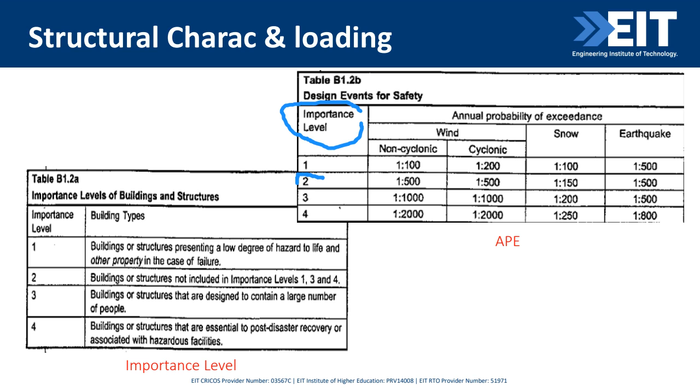Here are the tables that you can find in the standards. On the left side, you can see the importance level. We already know that the importance level is 2, so we can have the wind load and earthquake loads. This is the annual probability of exceedance, or APE, which as you can see here is 1 in 500 years.

How do we get the importance level? You can see here, importance level 2 covers buildings or structures not included in importance level 1, 3, or 4. Level 1 is buildings or structures presenting a low degree of hazard to life, so the most important part is the life of the people, and other property in the case of failure.

Level 3 is buildings or structures designed to contain a large number of people, for example high-rise buildings or any commercial building, as well as buildings or structures essential to post-disaster recovery or associated with hazardous facilities, for example fire stations and hospitals.

So our building, or our structure, which is the plant, is not categorized in group 1, 3, or 4, so the importance level is 2.

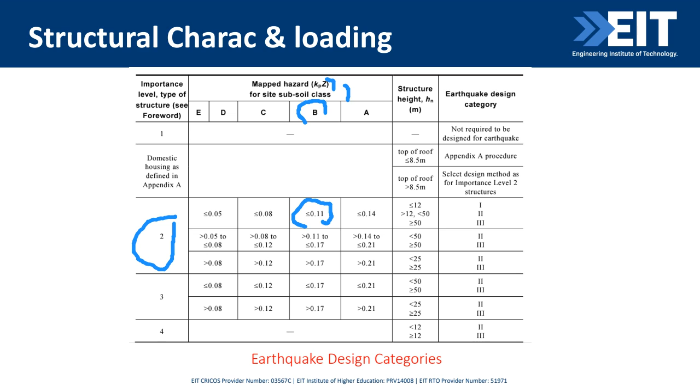From this table we can find out the hazard based on the site soil class. We have soil class B here, importance level 2, and also the structure height here is lower than 12, so the KpZ would be something lower than 0.11. This is the earthquake design categories, and this is how we can find the hazard factor.

And the other coefficients here, and this is also would be the base shear. So here, based on the equation, we have the base shear calculations. We already get to know the parameters that we need to put here.

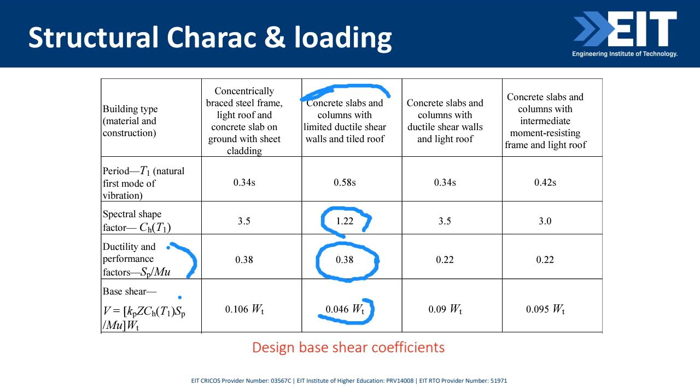At this slide, we have all the parameters that we need. Then substituting into this equation, we can find out the final equation for the base shear with respect to the weight of the structure.

We also need to consider that this weight of the structure is the in-service weight, because this is the LNG plant. The majority of the structures are prefabricated and just shipped to the location and installed on the footing. So we should know that for the earthquake design, we need to consider the operation weight, or wet weight. But for the wind design, we need to consider the dry weight, or shipping weight.

This is because in the earthquake, the base shear, as you can see here, is a direct function of the weight of the structure, and it affects the earthquake loads. For the wind design, the weight of the structure helps to resist the wind load, so we need to consider the dry weight of the structure, not the in-service weight.

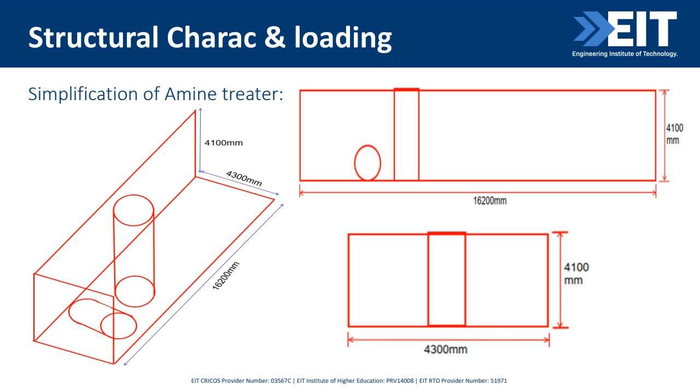The first step to solving this problem or doing the design is a simplification of this structure. We have something like this. This is the length and dimension of the structure, and these are different parts of the columns and containers. At the left side you can see the 3D view, and here is the view in this direction, and here in this other direction.

Footing design based on the earthquake structure loads using the structural toolkit. For this structure we consider 12 independent footings, 6 at each side. So if this is the structure, we have footings like this arranged on each side.

The design is done for the middle footings that take the biggest portion of the load. If we consider one footing here, one here, and one here, half of this and half of this, and also one here, would be transferred to this. So this is the tributary area of each footing.

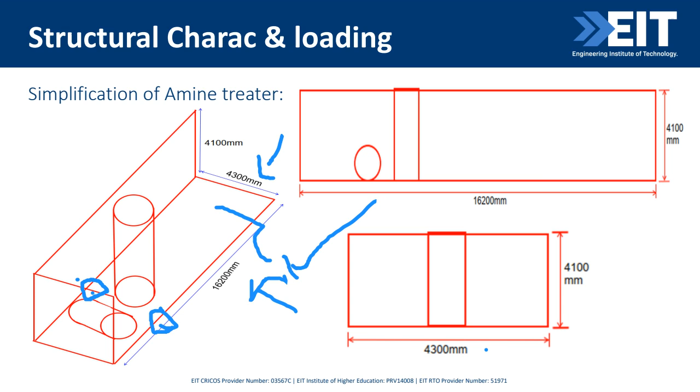The footing is designed considering 85% of the operation weight concentrated on the part where the containers are placed. So we need to design for this part, and we see that 85% of the loads would be applied on these two footings. So we design conservatively, and then we can generalize this footing for other parts, or do the design for the rest. It depends on the engineer's decision.

Here you can see the illustration of this structure, Amine treater. You can see 1, 2, 3, 4, 5, 6 footings at each side, and this is the longitudinal direction, and here is the transverse direction. So totally we have 12 footings, and here you can see the tributary area that considers 85% of the operation load applied to this part.

So the portion we are going to design for is these middle footings. This blue area is the tributary area for these two footings.

We already calculated the base shear, or the force of the earthquake, as 0.13 multiplied by the weight of the structure. Here we are going to design for these two footings, so we need to consider the tributary area for that footing. The total weight is about 411.8 kilonewton.

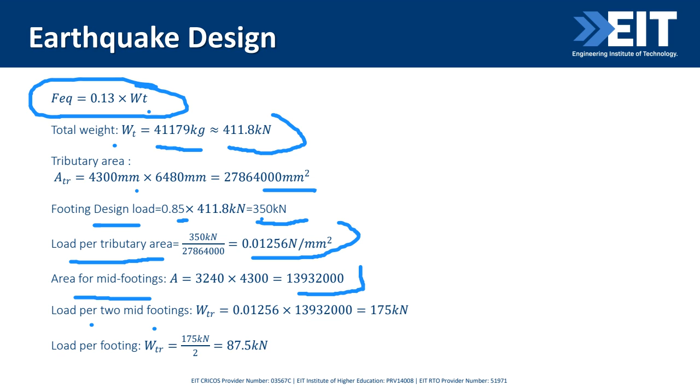Load per 2 mid-footings is the multiplication of the load per unit area of the tributary area multiplied by the area, which gives us the load for 2 footings. Since we have 2 footings, just divide by 2 - this is the load that each footing needs to support.

87.5. We have 3 load combinations. Combo 1 is 1.2 multiplied by 87.5 gives us 105 kilonewton. Combo 2 is the earthquake or seismic load, 0.13 multiplied by the load per footing of the tributary area, giving us 11.38. So this is the base shear.

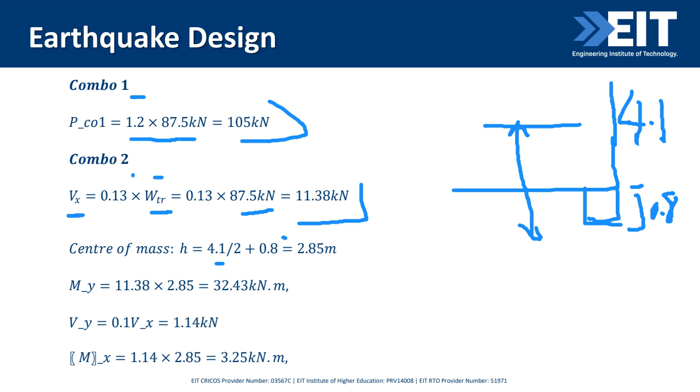Also, we need to consider the center of mass - the height of the structure is 4.1. The center of mass would be at the center. If we consider the initial stage, the total depth of this footing is 0.8 meter, and the height is 4.1. Considering the middle, this is the arm for the base shear, or center of mass: 4.1 over 2, which is 2.05, plus 0.8, is 2.85 meter.

Now we need to calculate the moment due to this base shear that applies here, kind of an overturning moment. 11.38 multiplied by 2.85 gives us 32.43 kilonewton meter. And based on the standards, the Vy, or the base shear at the perpendicular direction to the main direction, is 1/10 of this base shear.

Here we have the base shear 11.38, and 1/10 would be almost 1.14 kilonewton. The moment due to this shear would be the multiplication of this base shear perpendicular to the main direction by the arm or center of the mass, which is 3.25 kilonewton meter. We need to consider that these two actions work together.

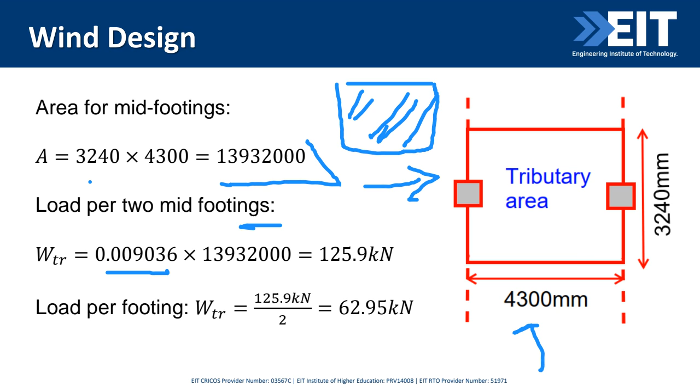We want to find out the load per tributary area because it is used in the design. So this is the tributary area here, and load per tributary area is just the multiplication of the load per unit area and the tributary area, which gives us 125.9 kilonewton. We have 2 footings, so the vertical load here is 62.95, but for the earthquake load, which we consider the operating weight, it was 87.5 kilonewton.

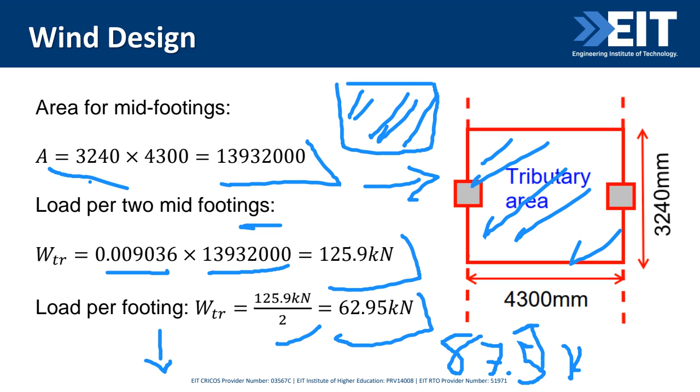Now we need to calculate the wind actions. If you remember, at the beginning of this webinar, the illustration of the Amine treater showed it is not a complete box. So it means we don't have walls here, but we have some equipment. So to not over-design, but also to be in a safe design, we consider 80% of this area as the area that gets the wind.

So wind load is calculated based on 80% of this area and this area. So 3.24 here, in this direction, multiplied by the height, which is 4.1, gives us 10.63 square meters. And we already calculated the wind load for this area as the factored 1.22 multiplied by A.

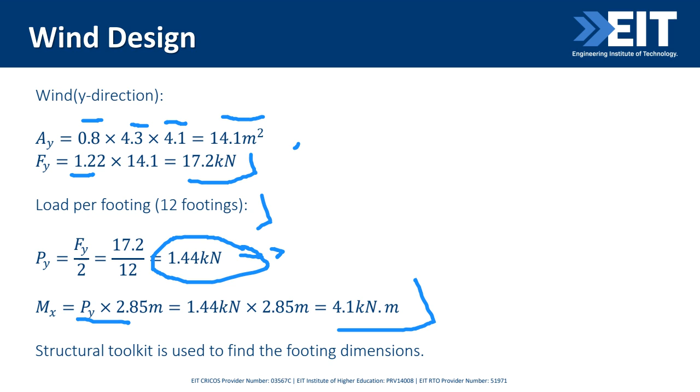And also the structural toolkit is used to do the design. So as we already did for the earthquake design, we put here the vertical load that we already calculated, and this is the moment, 18.5, that we already calculated, and this is the horizontal or lateral load or shear. This is auto-calculated by the structural toolkit, and the important part, or the substantial difference between the earthquake design and wind design, is that for the earthquake we have the x and y direction, or main and perpendicular to the main direction, but we need to put both, because when the earthquake happens we have shear forces or seismic loads in both directions.

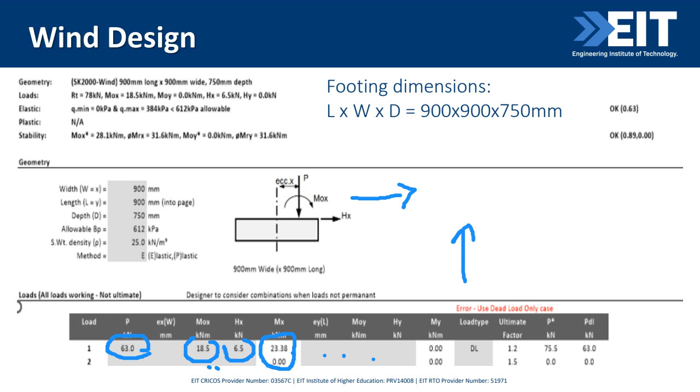But in the case of wind, we only have wind in one direction. We don't have wind blowing in two directions. So we need to consider the most significant one. And based on this data that we provided here, we have the design width 900, length 900, and the depth is 750. And referring to the geotechnical report, with respect to the size of the footing, we have this load-bearing capacity of the soil.

So so far, earthquake is dominant. For sure, we already knew that for short structures, earthquake is dominant. But when we go higher, for high-rise structures, wind is dominant. We can practically see this sort of thing here. So we need to do the design for the earthquake, because it is the dominant one.

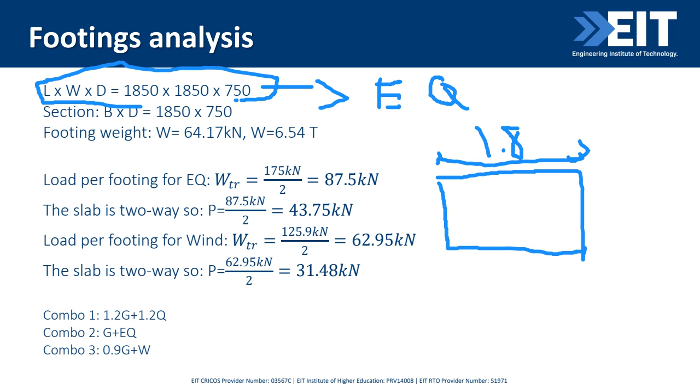Here we have the dimension of the footing that we already calculated for the earthquake. So we have the section. We consider for the SpaceGass modeling, we consider this section. Here is 1.85 meter, and this is the depth of the footing, which is 0.75. We already calculated, just for simplicity to illustrate, we also provided here the vertical load is 87.5 kilonewton, and we have two-way.

So this slab, as you can see here, this is the section. Here is the section, I write SE here, and this is the plan view. So the vertical load applies here. This dimension equals this dimension, am I right? Here is 1.85, equals this dimension, am I right? Here is 1.85, 1.85. Let me write down here for simplicity or convenience: 1.85, 1.85.

Because we have the criteria for the footing, when L over B is lower than 2, we have two-way slab. If it is greater than 2, it is one-way slab, meaning the load applied on the footing just transfers in the shorter direction. But here we have L over B smaller than 2, so we have a two-way slab. It means the load transfers in this direction as well as in this direction.

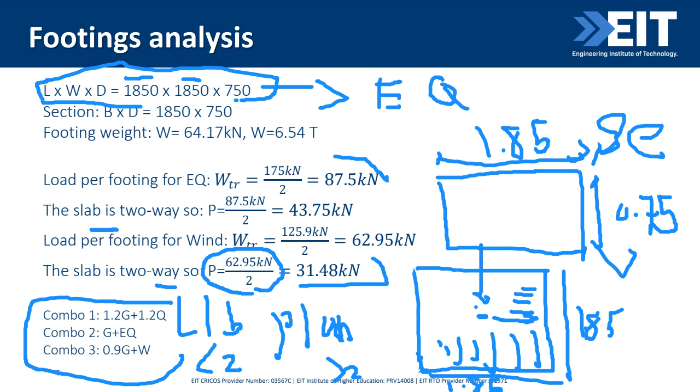We have 3 load combinations as shown here. This is the model made in SpaceGass. This is combo 1: 1.2 multiplied by the load we already calculated, 43.75, applied on this, and this dimension is 1.85. In SpaceGass you can just select this element and make a section for that. So the section is something like this we already showed.

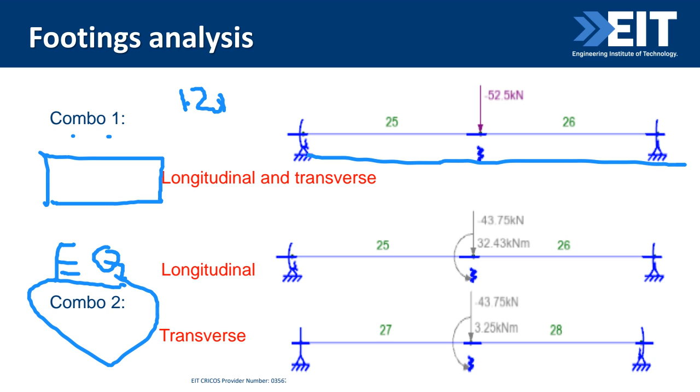Combo 2, we have 2 directions. This is the earthquake. So in the longitudinal direction we have the vertical load, 43.75, and this is the moment applied on the footing, 32.43. We also need to consider the spring here. You need to provide, based on the geotechnical report, the stiffness of the spring. So this is the soil here. You need to apply the spring stiffness.

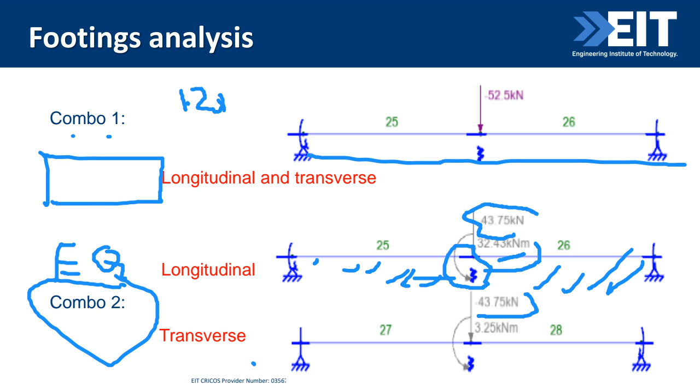And this is the transverse direction. You can see the vertical load is the same because it's the two-way slab, but the moment is 32.43. Here the moment is 3.25, which is 1/10 of the main direction. This is for the earthquake load. We also did the analysis for the longitudinal direction, and here is the transverse direction.

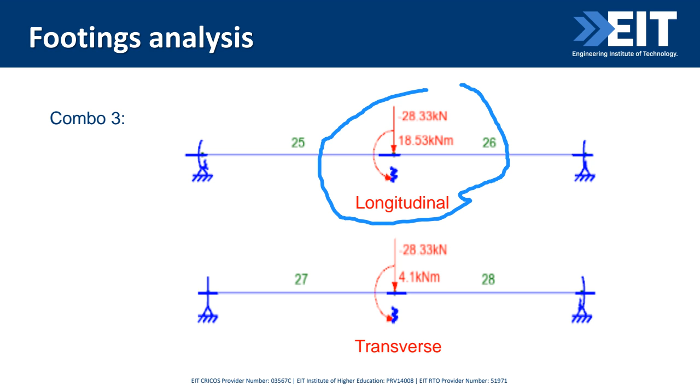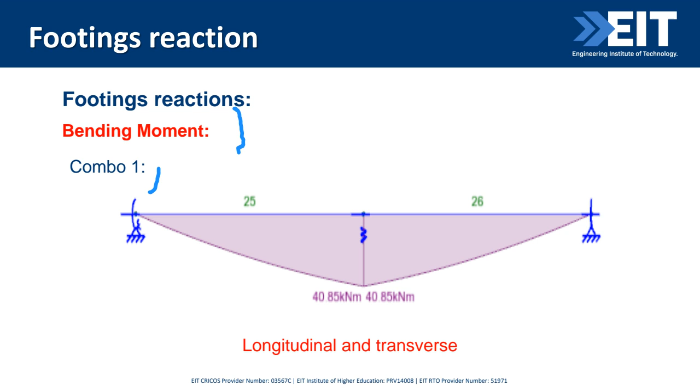And these are, after doing the analysis, the reactions. For combo 1, the bending moment looks like this, and this would be for combo 2, longitudinal direction. The moment is like this. This is the maximum moment that the footing needs to sustain in the longitudinal direction.

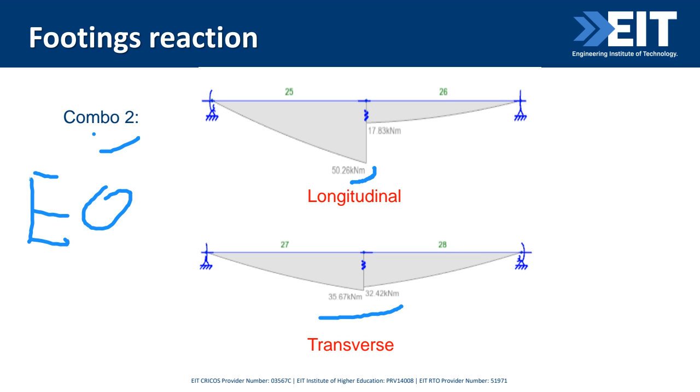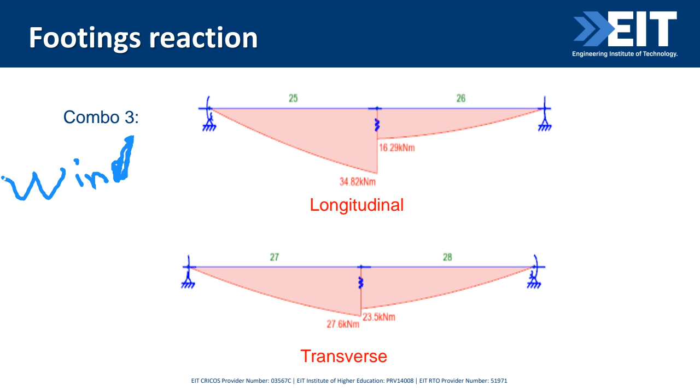And here for the earthquake loads, and here is the transverse direction. And here the wind load, combo 3, here this is the reaction in the footing. So the moment is 34.82, 27.6 kilonewton meter, the maximum.

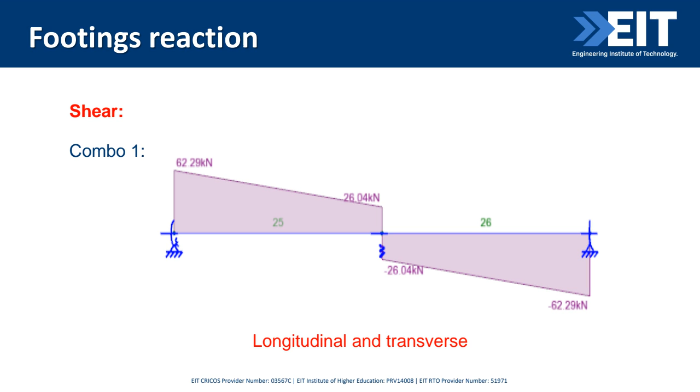Another reaction that we need to look into is the shear forces. You can see the variation and distribution of the shear force into the footing for load combination 1. Here is for load combination 2. And this is for load combination 3, which is the wind load.

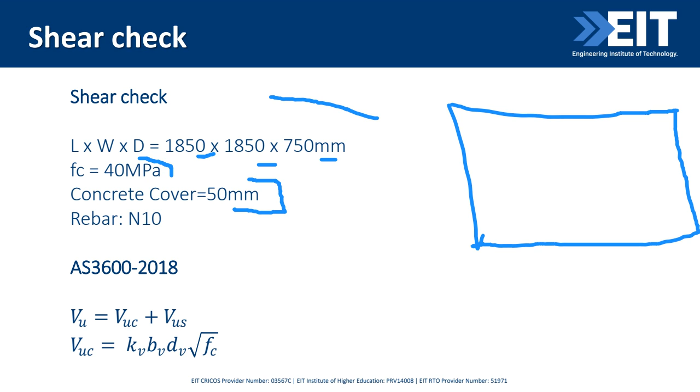Taking into account the moment and shear forces, we need to check the footing. We already designed the footing, and now we analyze it. We have the reactions, now we need to check it. We use 40 megapascal concrete, and the dimensions are this. We consider the 50 mil cover. It means that if this is the footing, here are the rebar, and this is the cover.

Now we need to do the shear check, based on the concrete standard AS 3600 2018. VU, the total shear capacity of the section, is VUC plus VUS. C refers to the concrete, S refers to the steel. VUC, the shear capacity of the concrete, can be obtained by this equation: KV, BV, DV, square root of the compressive strength of the concrete FC, which is 40 megapascal. These are the equations based on the standard that we can use. Because this is the footing and we don't use shear reinforcement, we don't consider shear reinforcement in the footing.

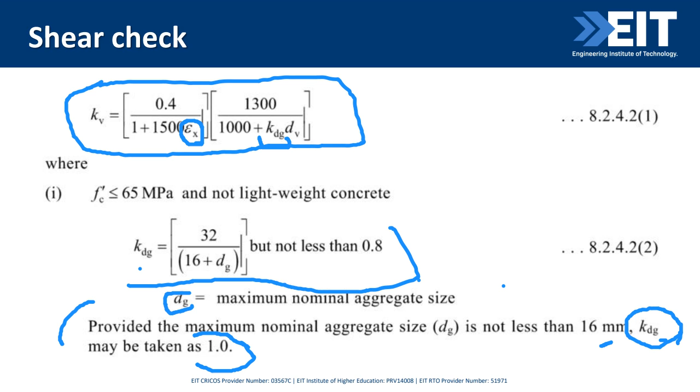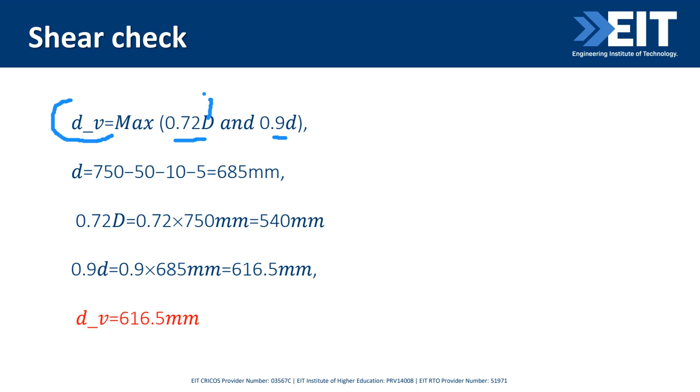So DV, based on the standard, the effective depth for shear, is 0.72 multiplied by the depth of the footing, and this is 0.9 multiplied by lower case D, which is the effective depth. What is the effective depth? This is the total depth of the footing, D, which is 0.75. Considering the rebar here, which we consider to be N10, here is 50 at the center line of the rebar. This would be the effective depth of the section, D small. This is D. So DV, the effective shear depth, is the greater of these two.

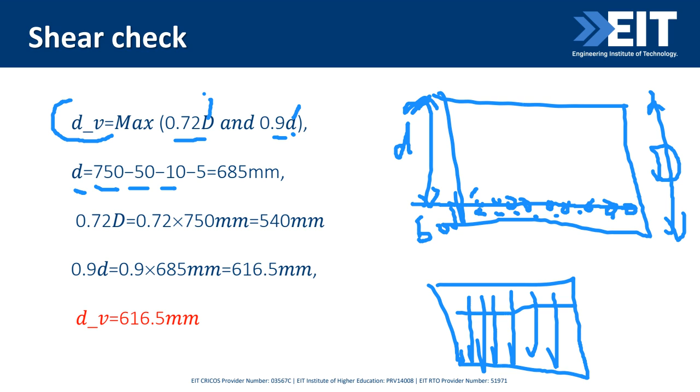We consider double reinforcement here. So 750 minus cover minus 10, the diameter of each set of rebar, because if this is the plan here, it is a net. Just consider at the bottom part, this is the bottom reinforcement, and this is the net here. So one is below, one is upper, as we can see here.

So 750 millimeter minus 50 minus 10 minus 5, because this one is at the center line of this rebar. So the effective depth of this section is 685 multiplied by 0.9 is 616.5 mil, and 0.72D is 540. So the greater of this, the effective shear depth is 616.5 mil.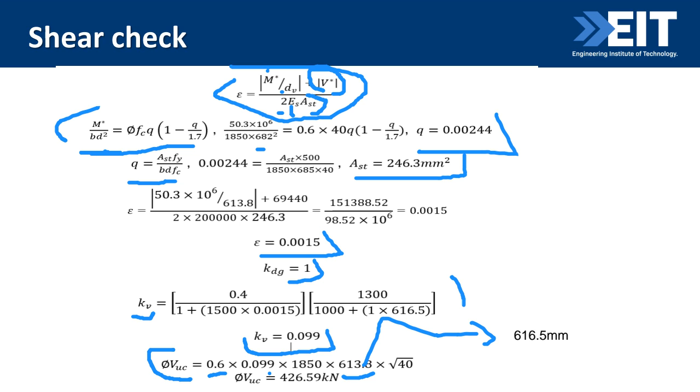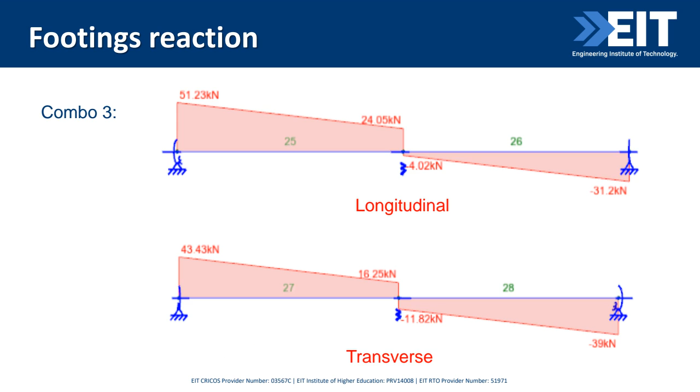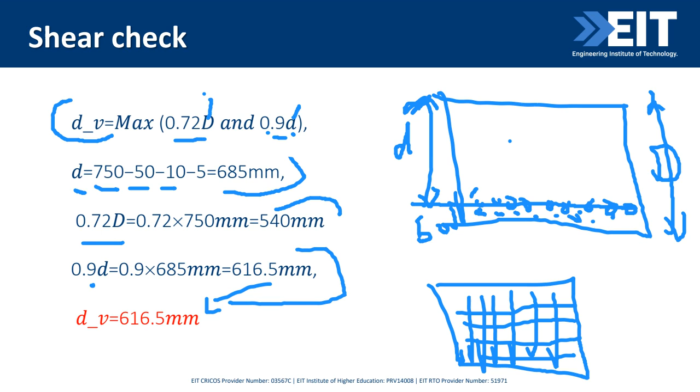Then you need to calculate the flexural reinforcement based on the moment that the section needs to sustain. Back to the reactions, you can see the maximum bending here is 50.3 kilonewton meter. So just using this amount and using this equation, we can find out the required amount of steel.

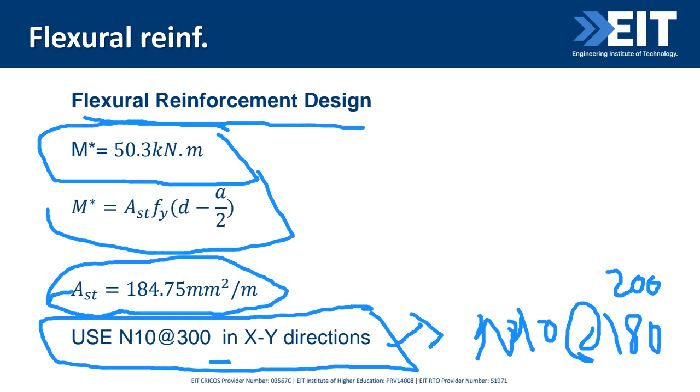We can use N10 at 300 spacing. Anyhow, this is what you can find here, but from experience, you'd better use N10, maybe at 180 or 200. It is suggested to be, but based on this equation, we can have this flexural reinforcement, or in order to be in the safe design, you can use N12. Anyhow, for now, based on this moment and this area of steel, we go with these equations, so we have N10 at the 300 mil spacing.

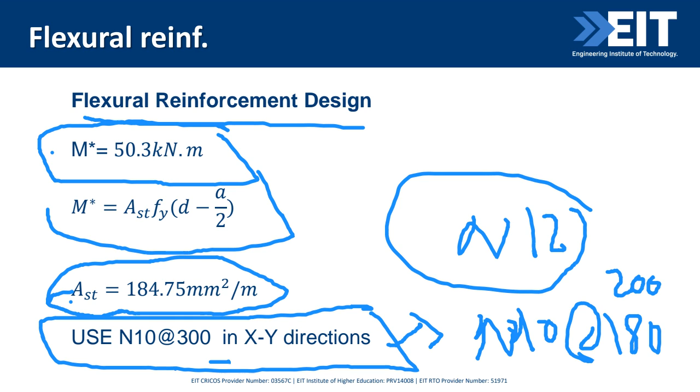Do you remember that we have this criteria, 2.5 ton? So we had to divide each footing in 3 parts, because this is the prefabricated footing, in order to make them portable or lift them and transport them to the location. So we need to connect these 3 parts together. So how we can do this? Using the shear connectors.

In order to design for the shear connectors, this is V, the shear stress, this is the applied shear force, Q is the first moment of section, or sectional first moment, and this is the second moment of inertia. B is the width. QC can be found using A multiplied by C.

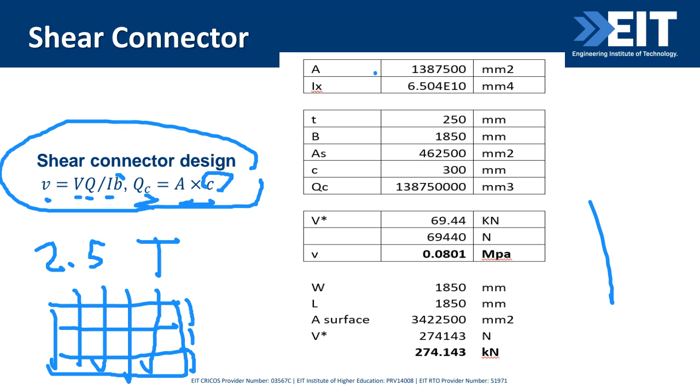A is the area, this is the area in the plan here, this area. And based on the characteristic of the section, here is the depth D, and here is the width. We have this I. T is the thickness of each section, 250. B is the width here, this one, B. And the area here is B multiplied by T.

C considers the spacing here, 300.

QC here is A multiplied by C. And V star, we already got this from the reactions in Newton. Just using this equation, we can find this.

This is W, this is L, so multiplication of W and L is the area, and multiplied by shear stress, we have this shear force that needs to be supported by this shear connector.

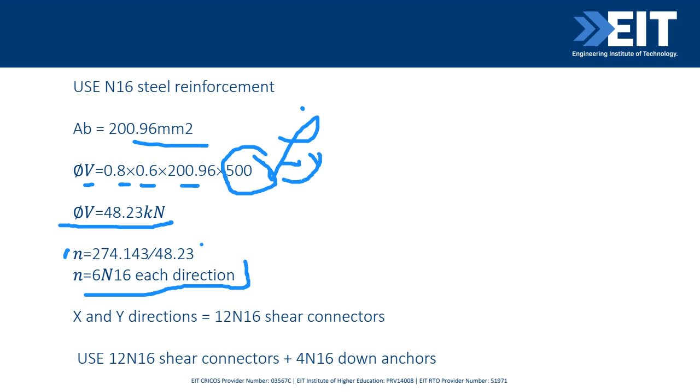The number of shear connectors can be easily found by dividing this shear force calculated here over the shear resistance of this rebar. So we have 6 N16 each direction, meaning we need 12 N16 shear connectors. We also need 4 N16 anchors. So if we have something like this, each direction.

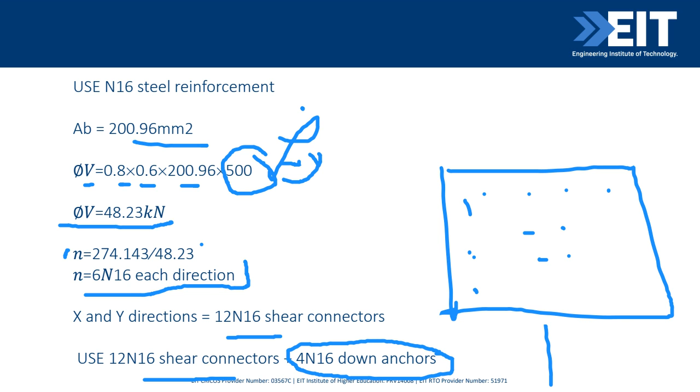6, then I will show you how to distribute this, and at the middle, 4 down anchors. If this is the section, they are like this. These are the down anchors. And here you can see the illustration of this.

1, 2, 3, 4, 5, 6, 7, 8, 9, 10, 11, 12. So we can distribute these 12 anchors into the footing to connect them. Here is this.

This is the depth and this is the width. You can see the shear connectors are like this. And this helps to connect these 3 parts together to work as one footing, because we have 3 prefabricated segments that we need to connect.

Also, you can see here, this is the down anchors that are shown here. And this is the flexural reinforcement.

Also, we can use the SL81 mesh here, as you can see. This is for the bottom part, but at the other parts, due to the lifting, we might have some deflection. So also due to some small negative moment, we would better have the mesh here in order to prevent any crack in this prefabricated footing.

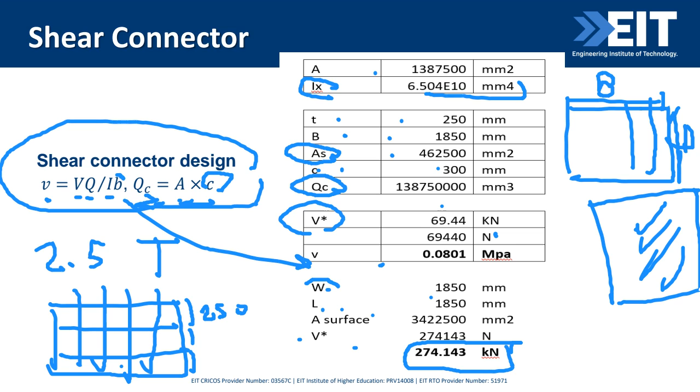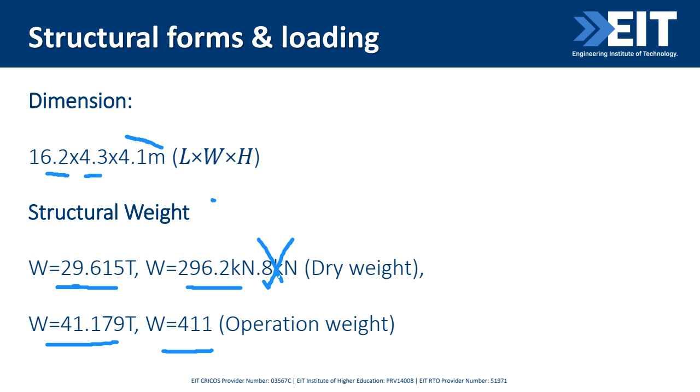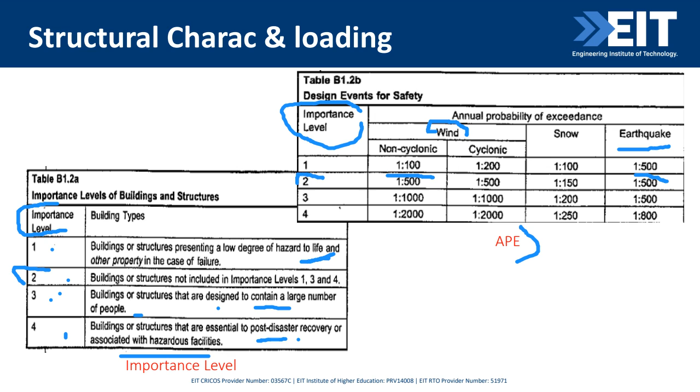You need to first find out the array of the footings and how many footings there are. Here you need to find out the weight that each footing needs to take. Then, based on the equations here that we already found using the tables in the standards, we already explained about these tables. The importance level is given here, and also the APE, which is the annual probability of exceedance. We can find out these coefficients from the geotechnical data, and also you can find out the soil class and this sort of thing.

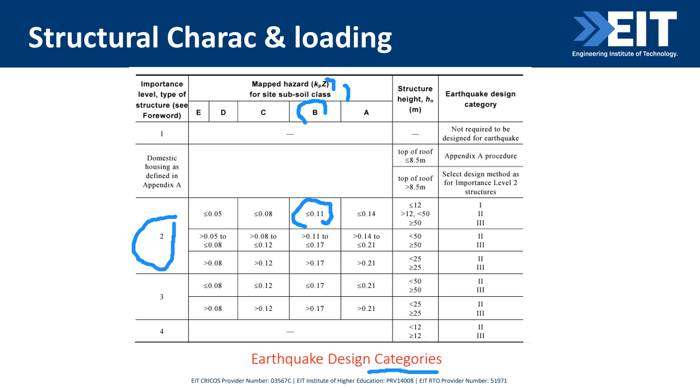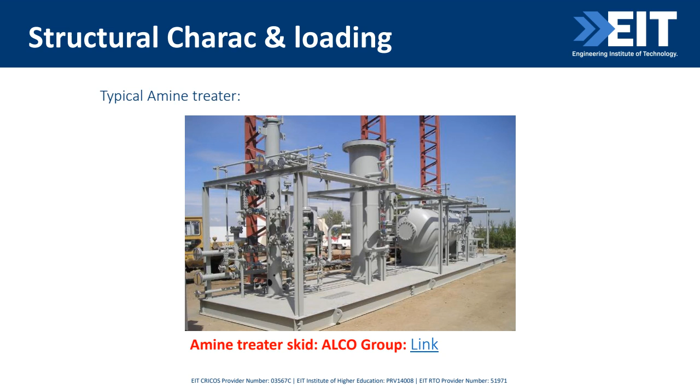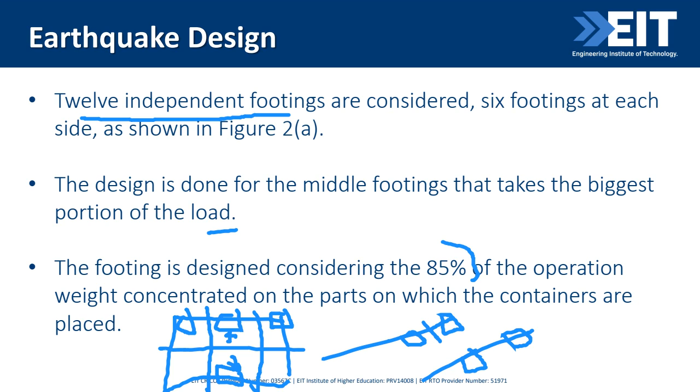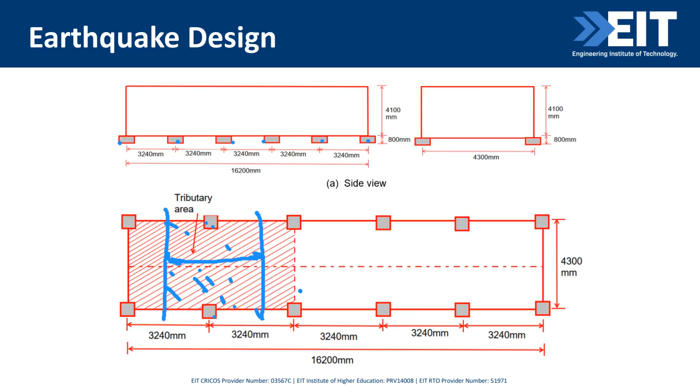Then just using this equation, substituting the amounts, you can find out the base shear or the lateral load. And with this illustration of the building, then just structural weight, load combinations, and then go for the earthquake design, considering 12 independent footings and the tributary area based on the configuration of the structure. Find out the load each footing needs to take here, as we already explained.

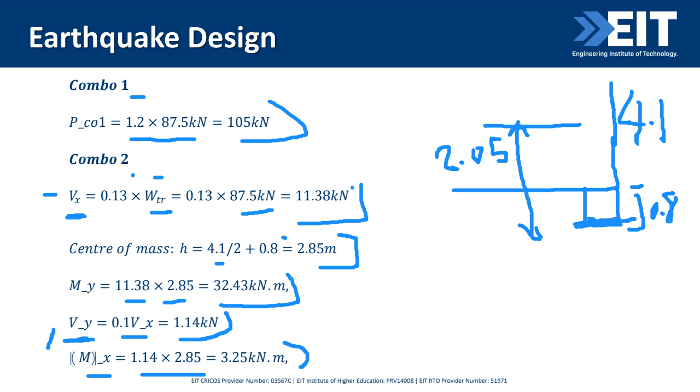The load for each footing is 87.5. Then 87.5 multiplied by 0.13 gives you the lateral load in the main direction, and in the perpendicular to the main direction, based on the standard, it is 1/10 of that. So this one. Then go to the structural toolkit, put the amounts here for the main direction, and here for the perpendicular or minor direction. You can then find out the footing dimension.

I think there is another question. Mustafa Siraj, we already explained why the operational weight is used for the earthquake design, because as I mentioned, the earthquake load is a proportion of the weight of the structure. So in order to ensure a safe design, and because it is in service, we need to consider the operational load. But for the wind, we need to consider the dry load, because the lower weight means the more conservative design.

Any other question, guys?

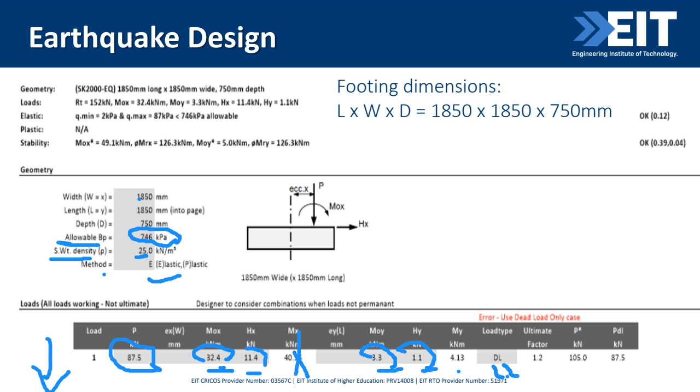Any other question? Barry, I think there is no more question. I will hand over the session to you to wrap it up and close out the day.